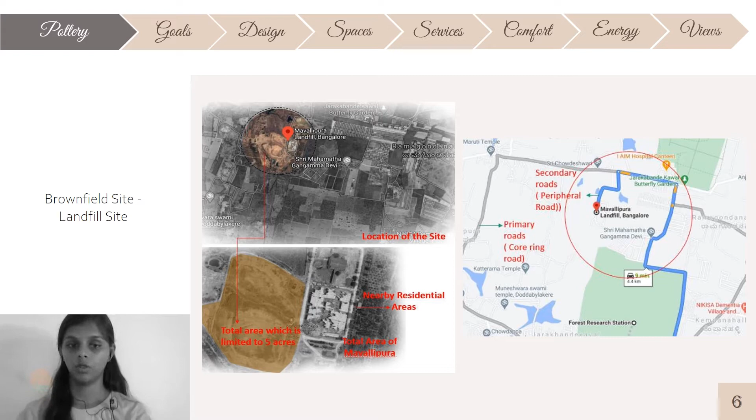Next comes the landfill treatment. We need to treat the landfill site, and then construct a pottery town. We chose the biomining process as the main tool, and the leachate produced all over the site would be converted to electricity and used for the energy production of the site.

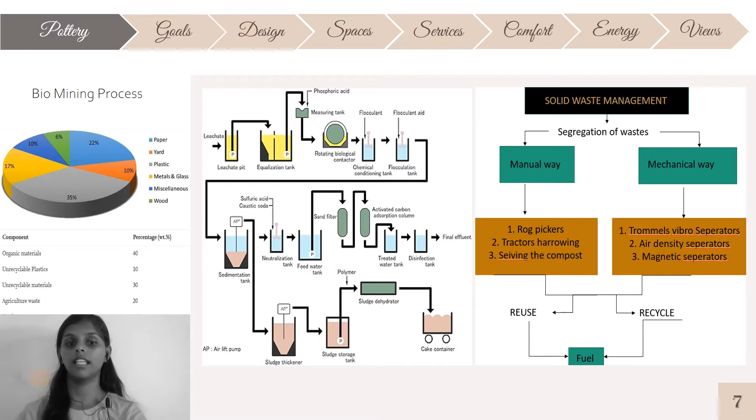Next comes the site analysis and land use around the surroundings of the site. The red part would be the site, and the major land use around it was said to be farmlands and also the commercial part. The predominant wind direction was southwest and northeast.

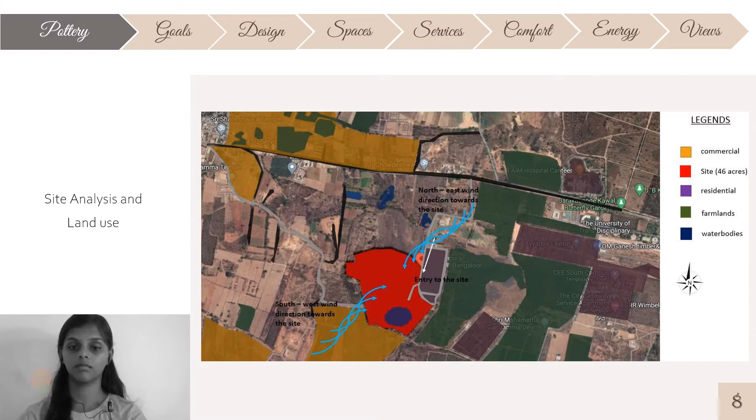Next comes the on-site and off-site features of the site. The orange part would be the site, which is going to be a pottery settlement and commercial space, and the rest of the 41 acres would be for the future settlement of the pottery artisans. We can see the residential area of about G+2, adjacent to the site.

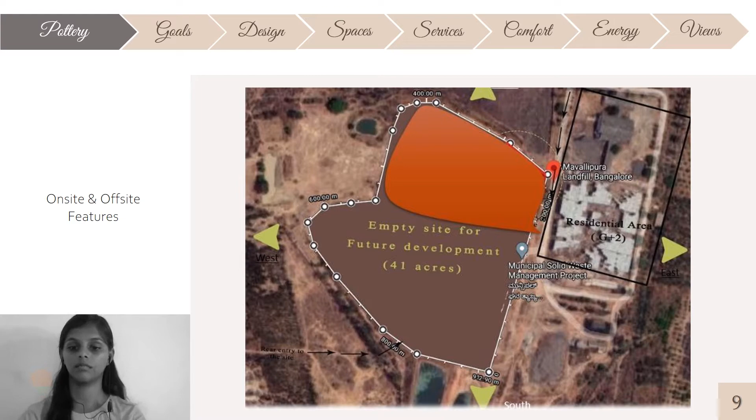Next comes the slope analysis of the site. The gray contour lines show the slope analysis, about 1 meter of gradual slope, and the existing vegetation can be seen around the site. The brown part would be the site, and the possible entry would be at the east direction of the site.

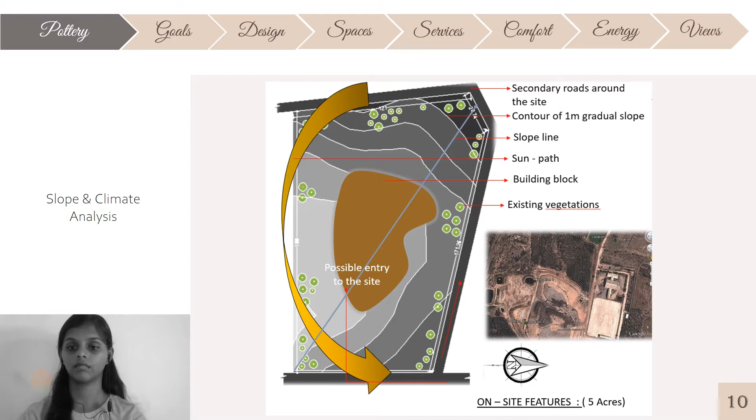Next, analyzing in the way of SWOT: the strength would be the sustainable site, flat land for the pottery, climate of the site, and the adjacent road. The weakness would be location, abandoned location, and linkage between the core zone and the site. The opportunity would be development of the landfill site, resettlement of the pottery village, and redesign of the sustainable site. The threat would be groundwater contamination and air pollution.

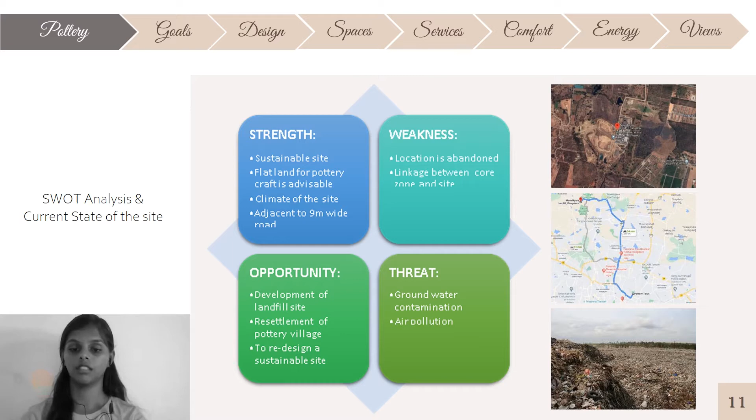Next comes the soil types and its construction. The major part of the soil was found to be red clayey soil, and the suitable foundation for the red clayey soil was the slab foundation, which can be used throughout the site.

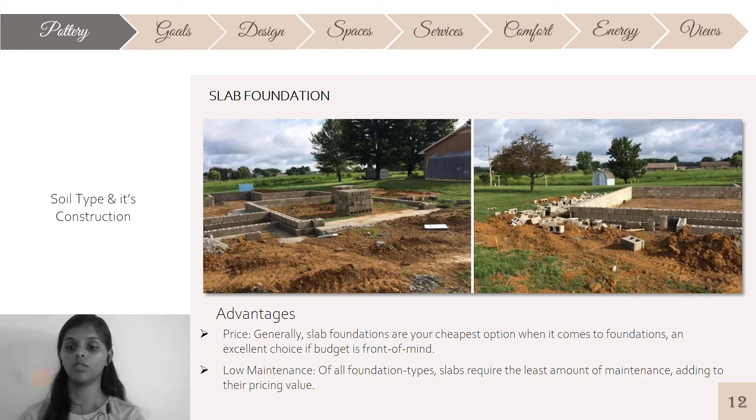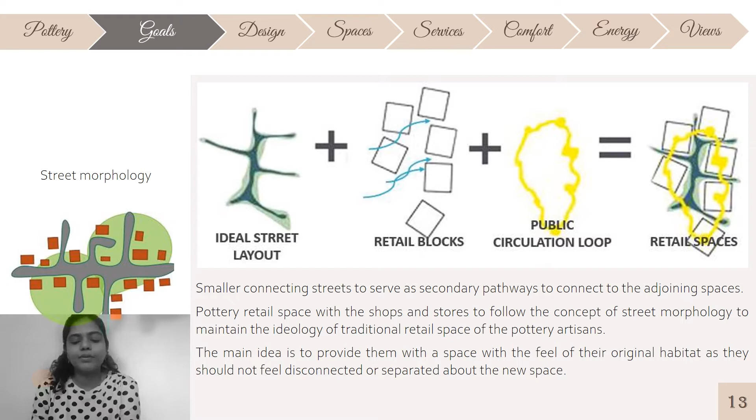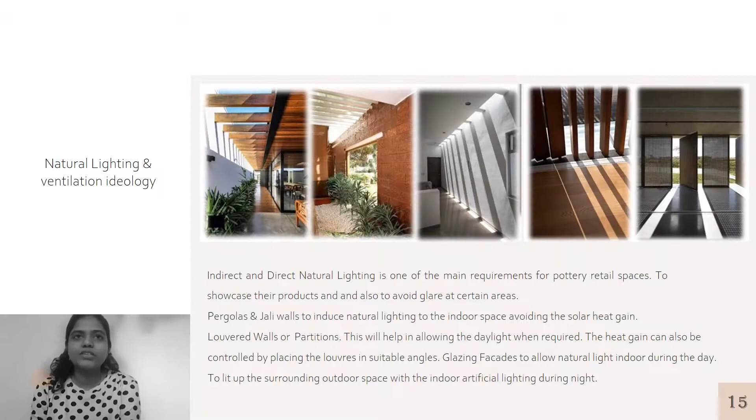Our main concept for the design is street morphology, in order to maintain the aspects of the traditional retail space of the pottery artisans and make them relate and connect to their new habitat. Low-rise planning depicts their traditional retail space with interactive spaces, with the concept of creating balance in lighting through various elements to achieve the required direct and indirect lighting.

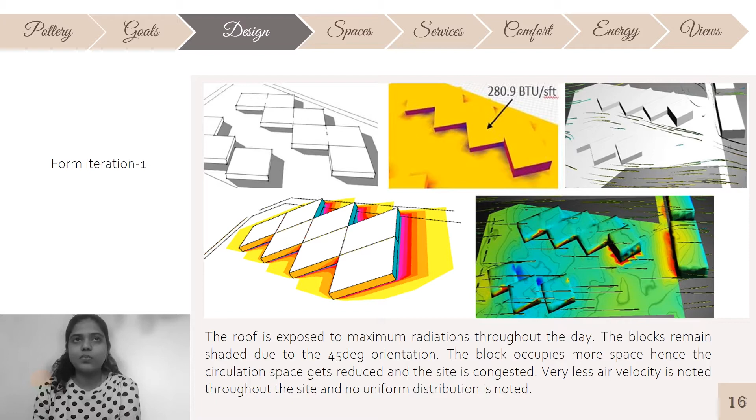Initial iterations were done for the basic square shape at 45 degrees, analyzing its effect on solar radiation, shadow, and wind. Square forms stacked up with spacings, projections, and voids show better results in casting shadows and improving wind flow. Analysis for rectangular forms placed at 45 degrees seems more efficient in terms of radiation and wind.

We concluded with a more efficient form of rectangles, casting shadows on the adjoining spaces during peak hours of the day, and also improving the wind pressure on the surfaces.

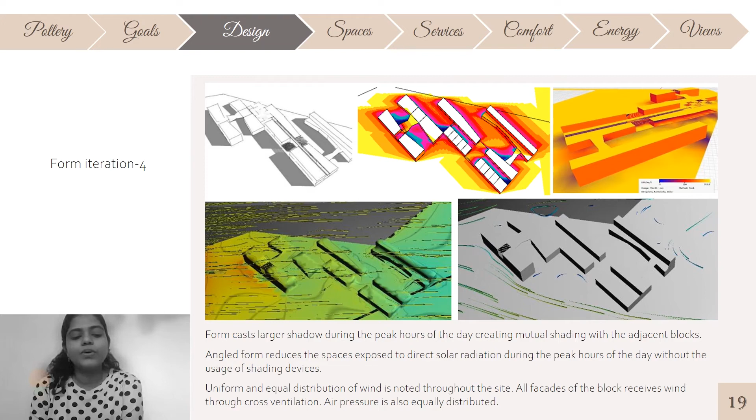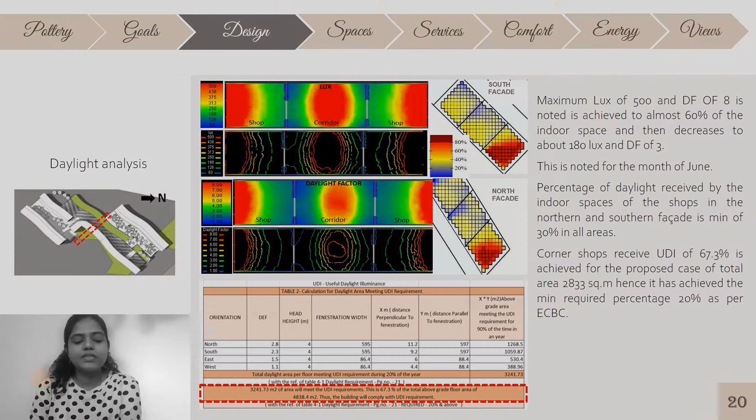Daylight analysis was done for the month of June. For the shop interiors and corridor spaces, a maximum lux level of 500 and a daylight factor of 8 is achieved, with about 67.3% of the total floor area meeting the UDI requirements. During the month of December, the required lux level and daylight factor is achieved with a window wall ratio of 30%.

Shadow analysis was done for the southern facade, covered with jali, and the plaza spaces covered with pergolas in order to shade the space.

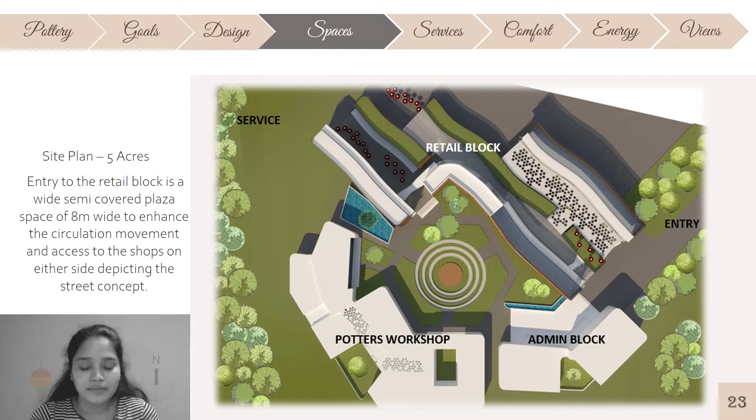Our site is a total area of 5 acres. We have designed the retail block in detail, whereas the potter's workshop and the admin area are for future development. The entry to the retail block is a semi-covered plaza, which helps in depicting the street concept as explained before.

Next we have site analysis. We have performed solar radiation and wind analysis for our site. In solar radiation, due to the effect of mutual shading, the radiation is reduced. And in the wind analysis, there is a uniform wind pressure along the retail block as it is oriented at 45 degrees.

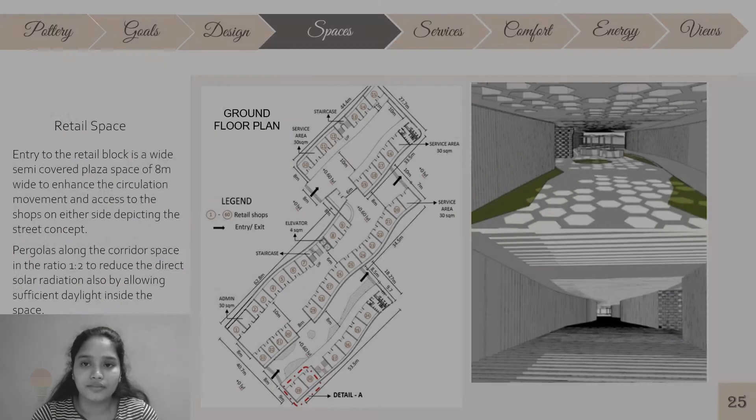Next comes the ground floor plan. In the ground floor block, there are a total of 60 retail blocks. They are arranged in a curvilinear form to break the pattern of regularity and create a flow in the design. Next we have the first floor plan. The first floor is connected through bridges and is entirely connected at the first floor level. Each retail shop is 6 by 5 meters.

The envelope of the retail shop is a double skin facade. On the outer side we have brick jali, whereas on the inner side we have glass louvers, which help in automation based on our needs, either for daylight or for ventilation. The ground floor retail shops have green roofs, which help in interaction at the first floor level for the users to have an interactive environment.

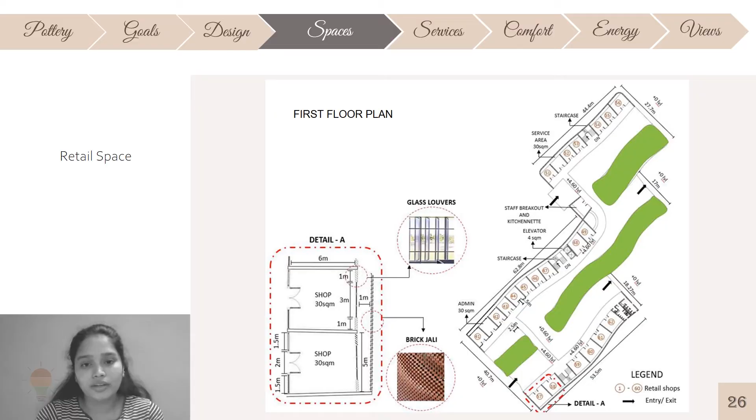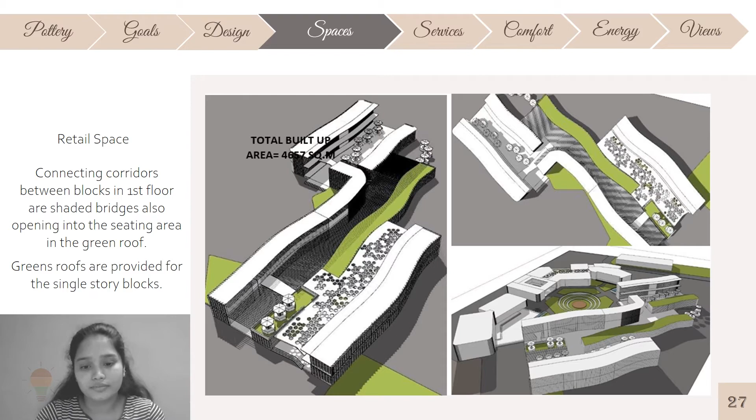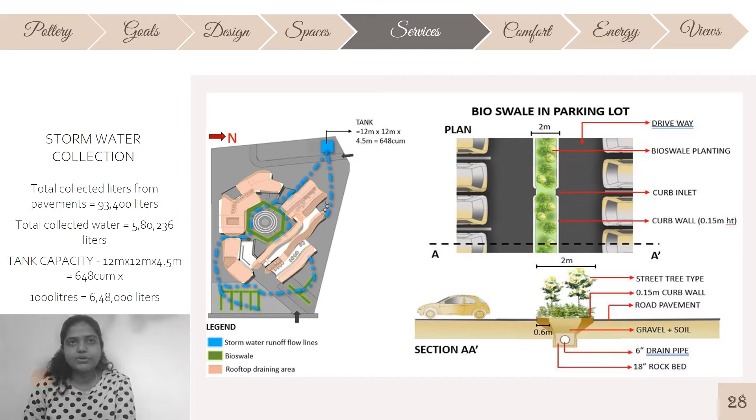Next we have the overall view of the retail shops, which shows the bridges connecting the retail blocks and the green roofs between them. Bioswales of 2-meter width are proposed at the parking lot and pavement area to collect the stormwater runoff. The required tank capacity is calculated to be 6,48,000 liters.

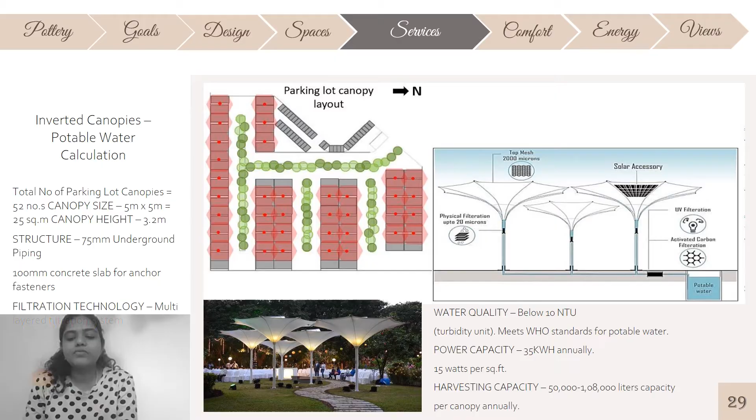Inverted solar canopies with inbuilt solar panels and a 3-layer filtration mesh collect and filter the rainwater and convert it to potable water. 52 such canopies of 25 square meter size are proposed with a power capacity of 15 watts per square feet. Rainwater harvesting is done for the rooftop and pavement draining areas, and the required tank capacity is also calculated. Grey and black water calculation is done based on usage per person at each space.

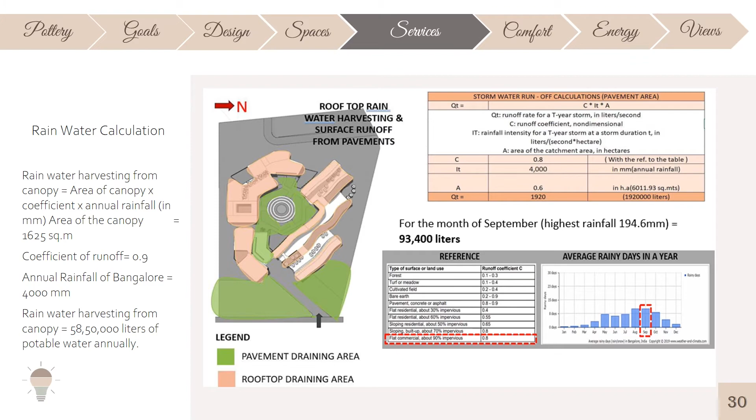Coming to the comfort study, jalis, pergolas, and the width of the corridors play an important role for occupancy comfort. So we designed jalis and pergolas with different ratios on each orientation. For the first jali on southern walls, we designed the jali with a ratio of 2:1 with a brick size of about 19 inch into 9 inch into 9 inch.

With this ratio, 2 is the solid and 1 is the void. By analyzing it with the sun hours and shadow analysis, it is found that 30 to 50% of heat is absorbed by the adjacent wall. This shows a shading time of 3 to 6 hours on the floor compared to 1 to 2 hours on the wall.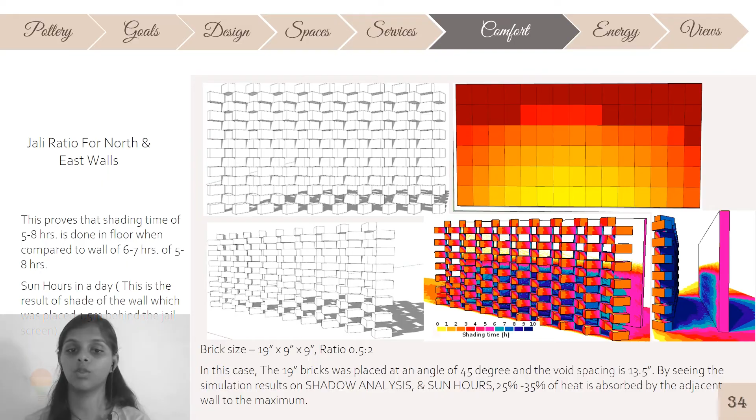And next comes the analysis of the pergola. So the pergola was analyzed with two iterations. One is with the 1:1 ratio, with the width of the pergola of 0.15 meter, and the void was also about 0.15 meter. So in this case, we had analyzed it with the sun hours and shadow analysis. By the result, we could get 6 to 8 hours shaded inside the corridor throughout the year in average.

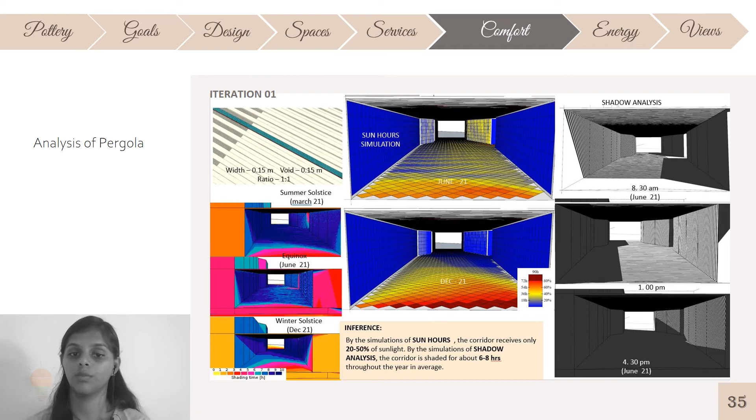And next comes the iteration 2, that is with the ratio of 1:2. The width is about 0.15 meter and the void between the pergolas was about 0.3 meter. So while analyzing again with the sun hours and shadow analysis, the shaded was about 4 to 7 hours throughout the year in average. So when comparing iteration 1 and 2, iteration 2 seems to be better and shaded with the natural daylight throughout the year in average.

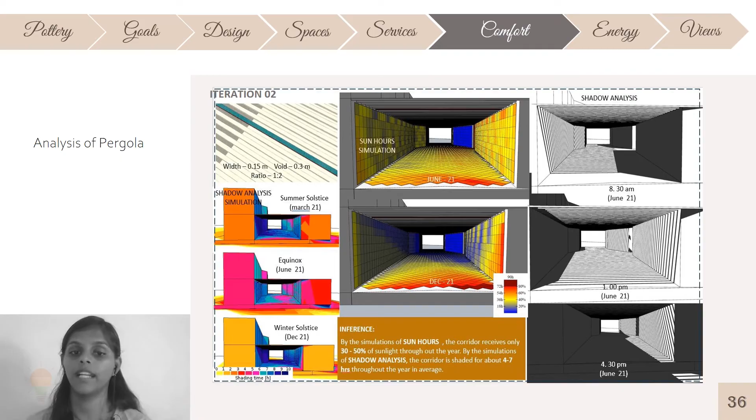And next comes the analysis of the corridor width. So we had tried with 3 iterations of different widths of the corridor, that is with 4 meter, 6 meter and 8 meter. Again, by analyzing it with the sun hours and shadow analysis for the whole year, it is found that the iteration 3, that is the width of the corridor of 8 meter, would receive partial daylight and shade throughout the year, which makes the occupant comfort very high.

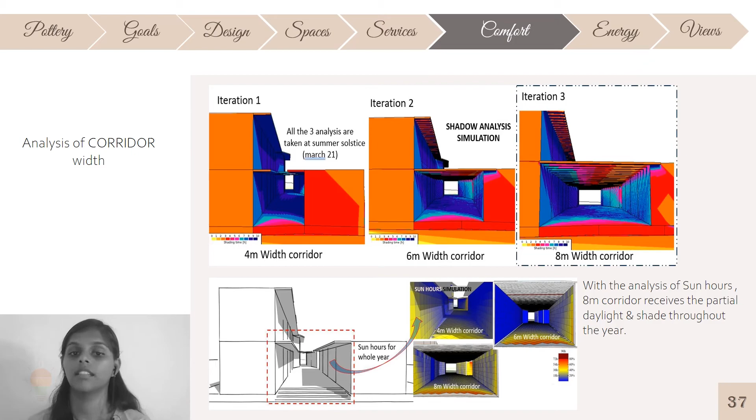And next comes the materials, that is the materials used for the wall and the material used for the roof. So at some cases we had used green roof, which can be accessible for the users to move. So the sum of all the material layers of the green roof was said to be the thermal resistance of about 8.26, and the heat loss was about 11.16 BTU per hour, and the heat gain was about 7.56 BTU per hour. So this makes the whole building cool.

And when coming to the wall materials, we had tried out with 3 iterations and we had concluded with the wall materials of the layers of brick wall and cement plastering, and the time lag was about 3.26 hours, which is less compared with the other 2 iterations, and the thickness of the wall was concluded with 255 mm.

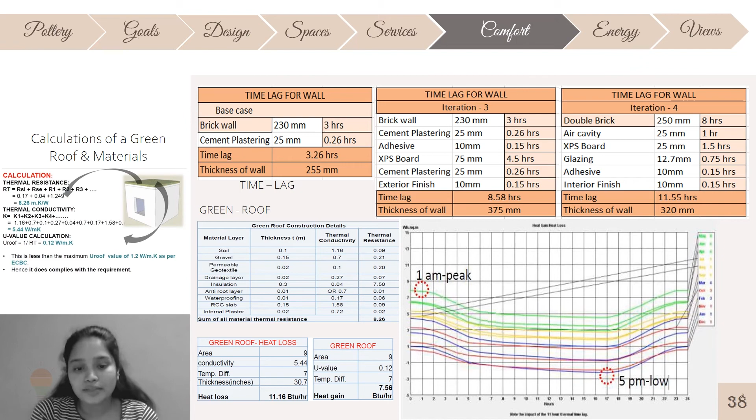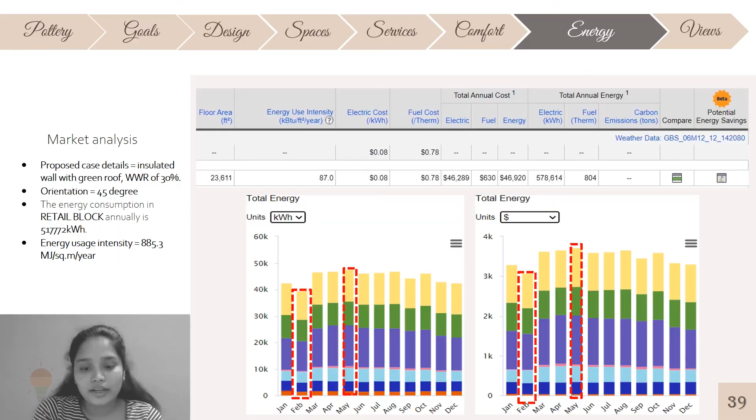Next comes the energy analysis. The proposed case model has a building envelope of insulated wall provided with the green roof and a wall window ratio of 30%, and the building is oriented towards 45 degree. The total annual energy consumption of the retail block is 5,17,772 kilowatt hours, whereas the energy usage intensity is 87. As per Solar Decathlon norms, the maximum energy usage intensity for the retail building is 100. So the energy usage intensity is gradually reduced.

Next comes the orientation, where the orientation plays a major role in determining the usage of energy. Our building is oriented to 45 degree, which is the least energy consumption orientation. When it comes to the lighting power density, for each shop, the lighting power density required is 579.6 watts, which is considerably low when compared to the norms of ECBC India.

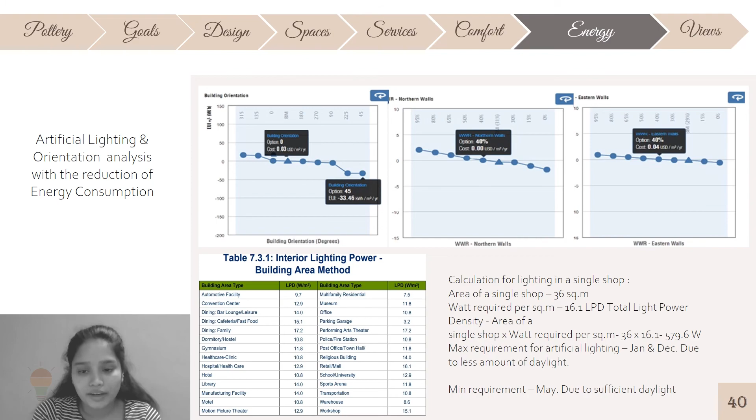Next, when it comes to the energy usage, energy production is also a main factor. So the solar panels are being provided at the rooftops of the retail block. The maximum amount of energy is being produced during the month of May, which is 42,279 kilowatt hour, whereas the lowest amount of energy being generated is during the month of February, which is 11,280 kilowatt hour.

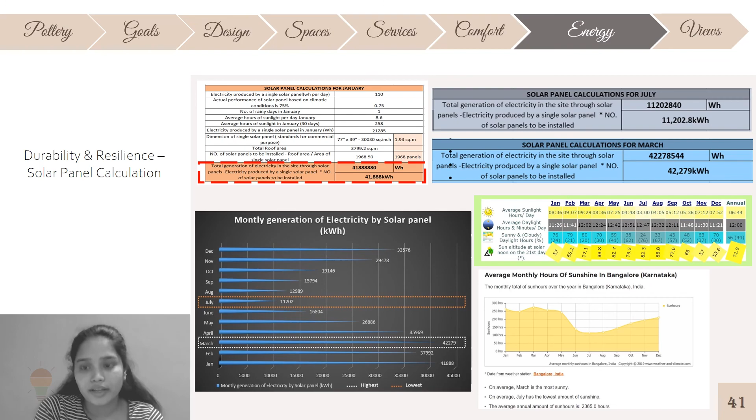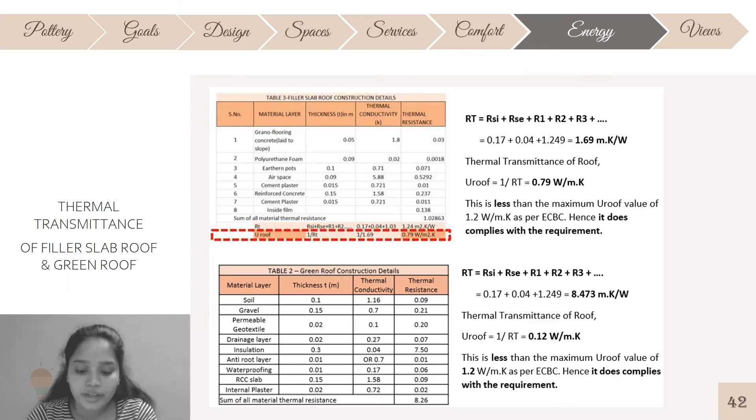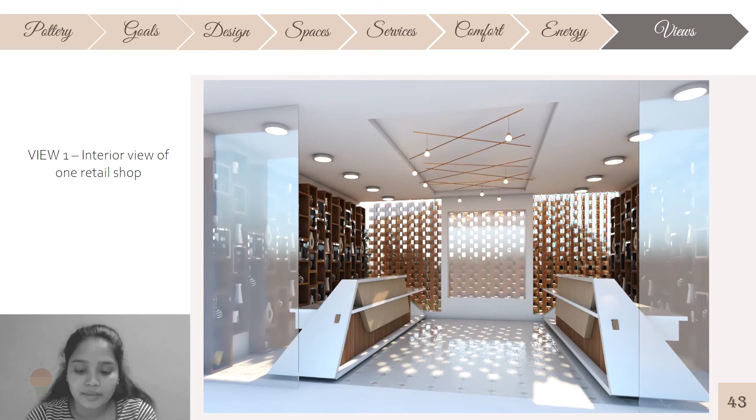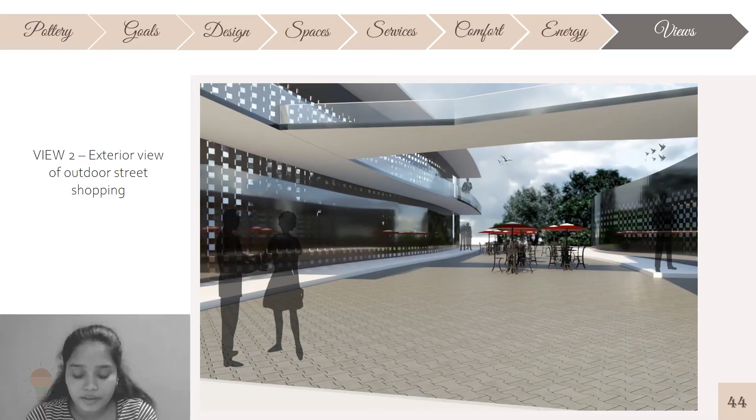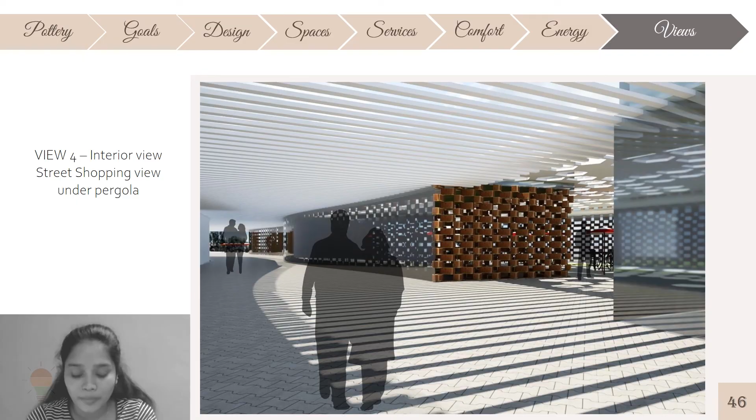And then next we have the curvilinear form, which was explained before, and it is also showing the pergola patterns. This is the entry of the retail block having pergolas, hexagon pergolas. This is the space which connects the two retail blocks.